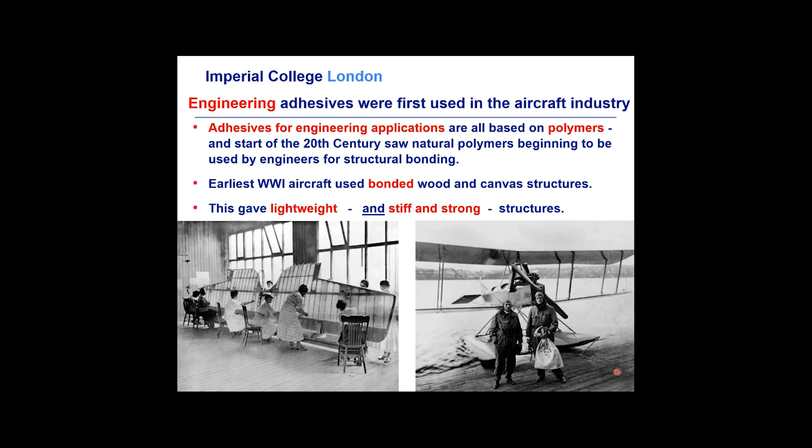Now, on from the First World War, in the Second World War, we have the very famous de Havilland Mosquito. It's all wood, of course, as I'm sure you know, and it's actually all glued together. It was developed really so that the furniture industry in North London and elsewhere in the UK could directly contribute to the war effort. Now, quite logically, they used their regular furniture adhesive, which was based upon a natural polymer called casein and was a byproduct of cheese production.

The glue was actually sufficiently strong and tough at first for the de Havilland Mosquito, but degraded when it was exposed to hot, wet climates and then completely lost its strength. So when the Mosquito aircraft were sent to the Far East in the very hot and wet climates there, they quickly started to fall apart. But we engineers are very innovative, and the maintenance engineers would put their heads into the wings of the Mosquito and smell. And if they smelt something like very old camembert cheese, they knew to take the plane out of service. So a very early form of a non-destructive test.

Later in World War II, the casein adhesive was replaced by synthetic polymeric adhesive, which was a urea-formaldehyde adhesive, which was far more durable and did not suffer such problems. In the 1940s, the first adhesive was developed for structural bonding of metals. This was a phenolic formaldehyde polymer toughened by polyvinyl formal. The first jetliner, the de Havilland Comet 1, flying in the early 1950s, needed to keep the weight down. And so this adhesive was extensively used to bond the thin aluminium alloy panels.

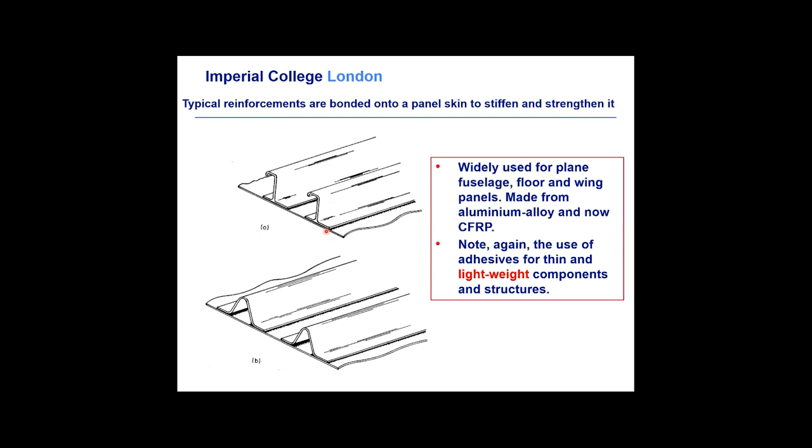And today adhesives are used extensively in aerospace and automotive industries. For example, a common use of adhesive is shown here. Here we have a thin aluminium alloy panel, just a few millimeters thick. And of course, that's all that separates you from the outside when you're flying. But to stiffen and strengthen and reinforce the panel, you can see here Z-shaped stiffeners or U-shaped stiffeners, and these are glued onto the aluminium alloy panel. So notice again really the use of adhesives for thin and lightweight components and structures.

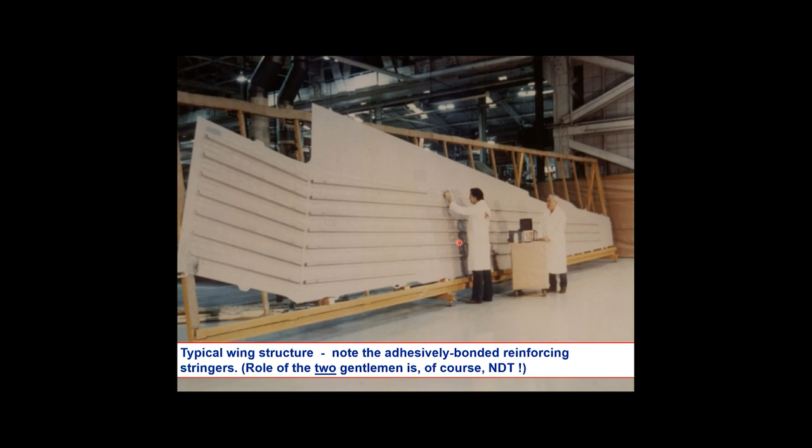Another use of adhesives is in making sandwich components. Here we have a thin skin, two thin skins, top and bottom. Here we have a honeycomb, and they're glued together to make this stiff, strong honeycomb panel. And it's also the way we make wind turbine blades, helicopter blades, and many, many other structures. And of course, without glue, how could you do it? You can't really envisage nailing or screwing this top panel onto the honeycomb panel, so we have to use adhesives.

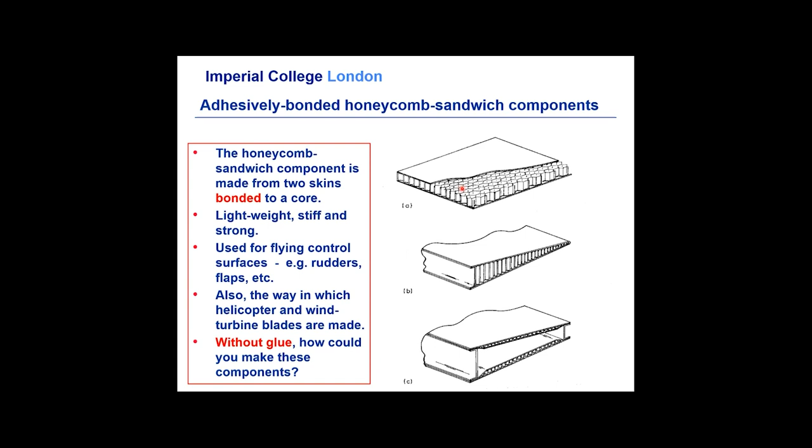This all comes together in an older type of aircraft using aluminium alloy, like the British Aerospace 146. So we have the fuselage, which is aluminium alloy with bonded on stiffeners and stringers, which give it its stiffness. We have the honeycomb structure in the rudder and the various control surfaces. So it's using adhesives quite extensively. And in fact, 90% of all the flying surfaces are glued.

So when you look out of the window and see that wing flapping up and down, etc., think of all that glue. And if you really are worried, my only suggestion really is to have that extra gin and tonic when at 30,000 feet. And that actually gives you a little bit more trust in adhesives.

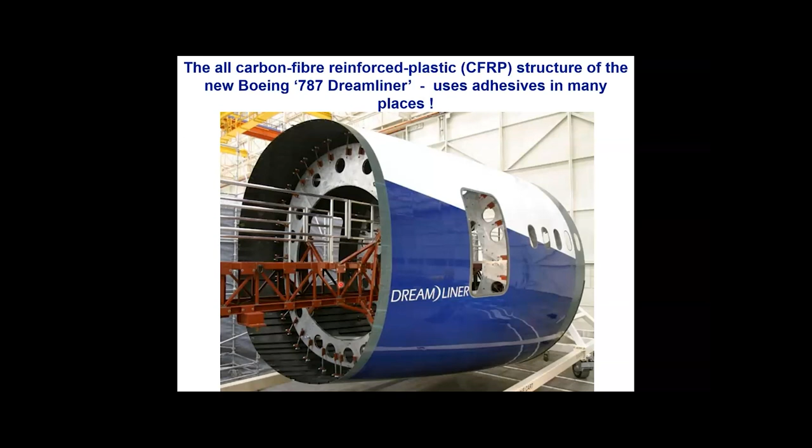So we've got carbon fiber reinforced plastic in many parts of the plane, and there's equal use of adhesives as with older metallic aircraft. In fact, you can see this here. This is the part of the equivalent Boeing 787 Dreamliner, and the Dreamliner uses adhesives as well, bonding carbon fiber plastic. You can see here the carbon fiber plastic being black metal, as the engineers like to refer to it.

So here we have the CFRP in the fuselage, and again we have thin skins. So again we reinforce the thin skins by bonding on these longitudinal stringers using adhesives to give the fuselage its stiffness and strength.

It's not only in the aircraft itself, but it's also in the engines now. If you look at what's called the front fan of an aircraft engine, and this is what you see if you board up the steps. So if you walk up the steps and look at the engine, you're looking at the front fan. The latest designs replace the front fan from metal into carbon fiber reinforced plastic.

You get a weight saving in the fan blades themselves, but you actually get a larger weight saving because the design has to allow for the fact if a fan blade breaks, it's actually contained within the engine. This, if it's a metallic blade, requires the engine casing to be thick, heavy steel, but if it's carbon fiber plastic, then it can just be a Kevlar type fabric. So you also save a lot of weight with the containment.

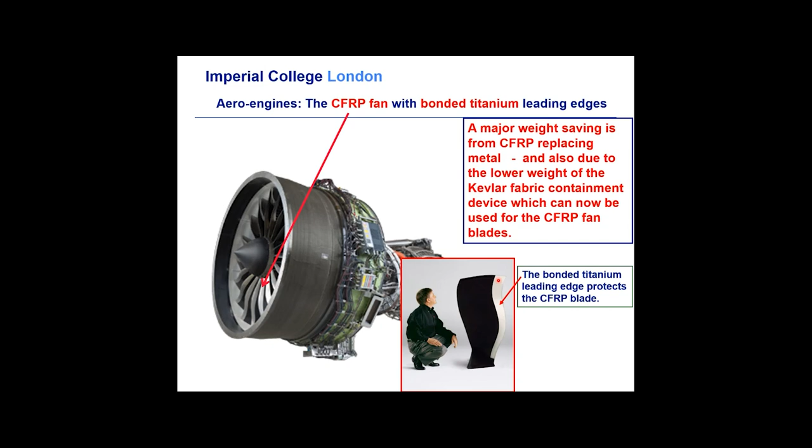But to protect the front of the fan blade from erosion, and also to cut up any bird that may enter the engine so it doesn't do any damage later on, the blade actually has a thin bonded titanium leading edge, which is glued onto the blade to actually protect the blade during use.

Now, if we think about the science behind the technology of adhesion and adhesives, then there's really three main steps we need to consider. Firstly, we need to establish intimate molecular contact and strong, stable molecular adhesion forces across the interfaces between the adhesive and the substrates being the materials we're joining.

Now, to achieve this first step, we need the adhesive in a liquid state, but now we wish to harden the adhesive to form a high molecular weight solid polymer which has strength and toughness and stiffness, and which will carry the loads, sustain impact damage, etc. And obviously, as engineers, we really want to ensure and predict the service life of the adhesive joint.

So there's really three separate stages we need to consider: the wetting and adhesion, the polymer chemistry, if you like, the hardening of the adhesive, and also as engineers to ensure and predict that the service life of the adhesive is sufficient for its application.

We therefore need to bring together surface chemistry, as you'll see, we often need to surface treat the materials before we join them, polymer chemistry of the adhesive, the physics of the process, and mechanical engineering in order to understand the science and technology of adhesion and adhesives. So we truly need the interdisciplinary skills from many branches of science and engineering. And I find that's what makes the science and technology of glue so interesting, is it's a true interdisciplinary subject.

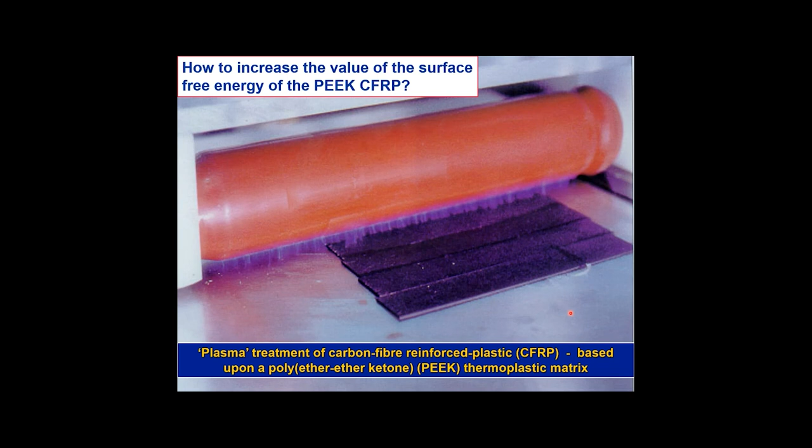Now we can look at this in more detail as surface chemists using a technique called X-ray photoelectron spectroscopy. In this technique, we fire X-rays at the surface and look at the photoelectrons which are ejected. The photoelectrons which are ejected just come from the first few nanometers of the surface. And what they do is identify the groups on the surface regions of the material.

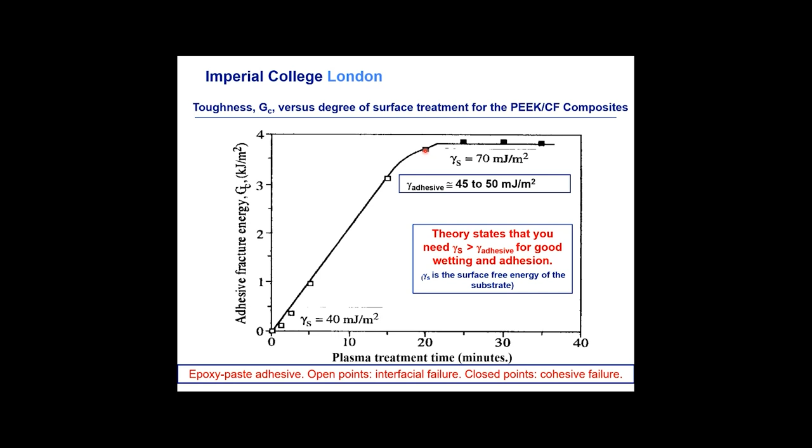Down here we obviously haven't met this criterion, and therefore we get poor wetting and adhesion, while up here we get the surface energy of the PEEK carbon fiber composite to be 70, greater than 45 to 50 of course, and therefore we get excellent wetting, very good adhesion, and we get cohesive failure through the adhesive layer itself. So the failure is in the glue, and that's why it plateaus out, and we have a toughness coming up for 4,000 joules per meter squared, which is very, very good indeed. So you can see the surface treatment is terribly effective for these thermoplastic fiber composites and is widely used now by industry.

Moving on to the next stage, and this is concerned with hardening of the adhesive. Now, to achieve the earlier requirement of good wetting and spreading, we needed a liquid adhesive to spread over the substrate, get intimate molecular contact, and achieve these high levels of intrinsic adhesion forces. But now, of course, as engineers, we want the joint to withstand high loads, be tough, etc. And therefore we have to harden the adhesive, or cure it as it's termed, to form a polymeric solid. And this really emphasizes the role of polymer chemistry and physics.

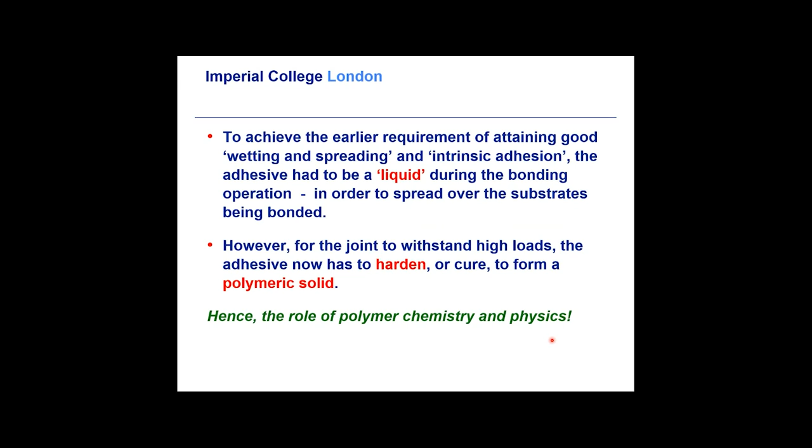Now, to harden the adhesive, for structural adhesives, engineering adhesives, we tend to use a chemical reaction. And therefore we have epoxy adhesives, which are very widely used and are cured by the addition of a second component and possibly with heat. I'm sure you're all familiar with two-tube Araldite. One tube is the adhesive and one tube is the second component hardener.

Other adhesives like super glue, cyanoacrylates, cure by moisture, and that moisture is present on the materials you're trying to join. Metals always have some moisture present at the molecular level, and that's why super glue works great on metals. Plastics don't have that level of moisture, and therefore they are not so good when using super glue. And other adhesives like acrylics cure with UV light, and they are widely used in the electronics industry.

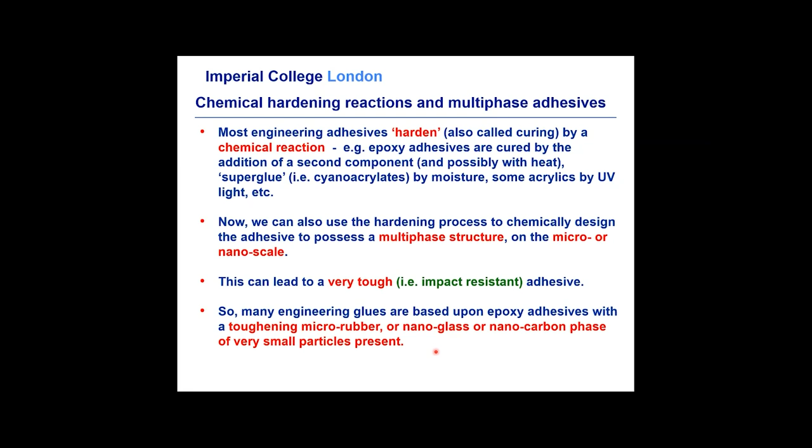But as materials engineers, we can also take advantage of the hardening process to chemically design the adhesive to possess a multi-phase structure on the micro or nano scale. And this can lead to a very tough, impact-resistant glue. So many engineering adhesives are based upon epoxy adhesives with a toughening micro rubber or nano glass or nanocarbon phase of very small particles present that give this multi-phase material, which can be very tough. And this shows an example.

Now, the presence of the rubber particles means that when the material is stressed, at a crack tip, for example, there will be a stress concentration of about 2 around their equatorial plane.

And this stress concentration in this area is good because the stress concentration arises from the difference in modulus and Poisson's ratio between the rubber and the matrix, and the stress concentration causes plastic deformation and energy absorption in the epoxy. So the rubber particles really act as catalysts in a sense for plastic deformation in the epoxy, and this can lead to higher toughness values by up to a factor of 20. So it's really very, very impressive.

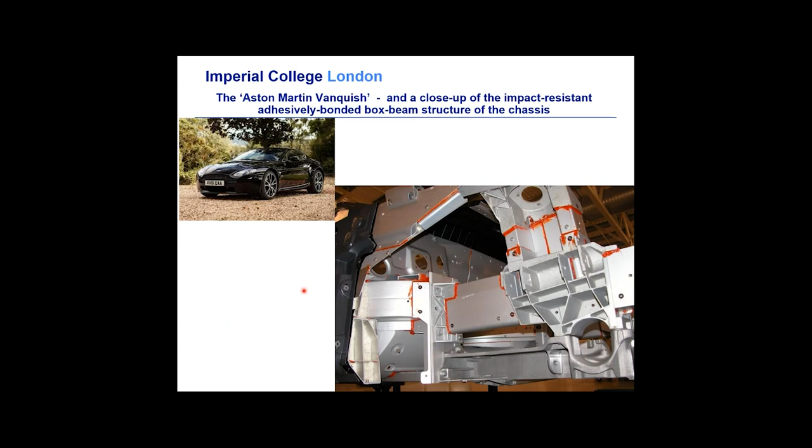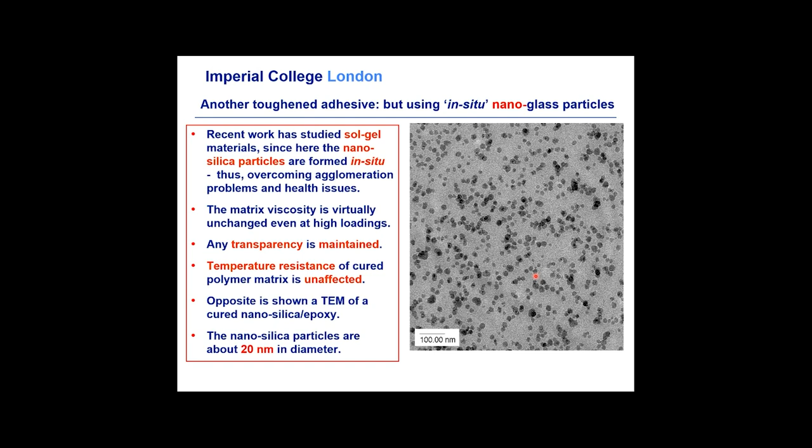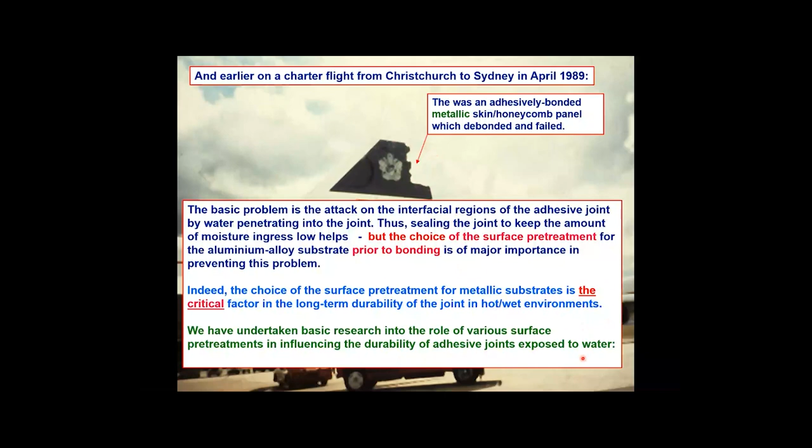As I said, the basic problem is really the attack on the interfacial regions between the adhesive and the oxide. Water gets in, attacks these regions, weakens them, and possibly leads to this problem of early service failures. So you can see that the surface pre-treatment for the metallic substrates is likely to be an important factor. In fact, it's the key factor in determining the long-term durability of the joint in hot, wet environments. And we've undertaken basic research in the role of surface treatments in influencing the durability of adhesive joints to water.

This shows aluminium alloy. It's a section, so you're looking at a section through aluminium alloy. And the standard treatment for aerospace aluminium alloys is to anodize. You put it into acid and pass a current through the solution, and this generates an oxide layer about 500 nanometers thick. This is the top surface to which you would apply the adhesive. Here's the aluminium alloy underneath it. Remember, this is a side section, so you're looking sideways on.

And it's rather like a collection of empty drinking straws. You can see there's a hollow here, potentially which an adhesive could get into to fill. So you're really looking at a side section of open-ended drinking straws, which forms the oxide on top of the aluminium alloy. But it's actually quite a complex technology. And what we found in the research was that if you applied just the epoxy adhesive straight to the oxide, you actually got poor joint durability.

And we wondered why. And the reason is here, this is a section again, so we're looking sideways on. This is an energy filtered TEM, and energy filtered TEMs allow you to identify elements. So we have the adhesive here, which goes off the slide into the distance. Here's about half a micron, 500 nanometers, of the oxide generated by phosphoric acid anodizing. Here's the aluminium alloy.

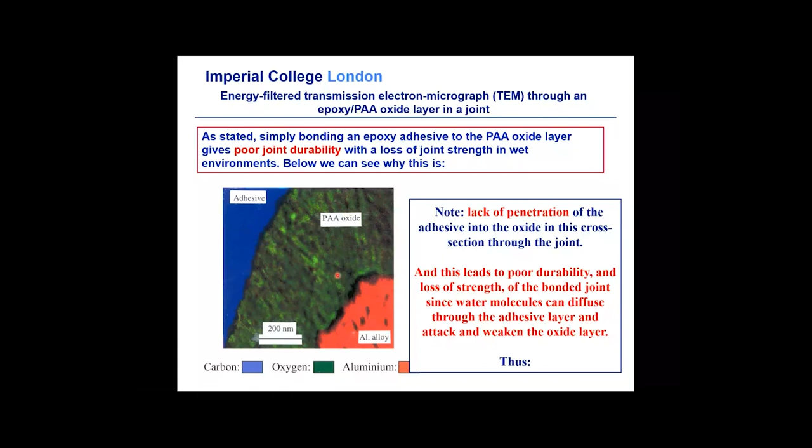Now, the way of avoiding this is to apply a primer. So you can apply a primer, which is a very low viscosity material, usually an epoxy, and usually the opportunity is taken to put corrosion inhibitors, coupling agents to aid bonding, such as chromates, phenolics and silanes. It's really like a witch's brew into the primer.

Now, the primer layer is usually about 100 microns thick, and therefore on this scale the primer layer is off the slide, and then the adhesive layer is applied on top of the primer. But the important aspect is really the primer oxide interface. So you can see now the primer, and carbon is blue, remember the carbon penetrates deep into the oxide. So you get primer penetration into the oxide.

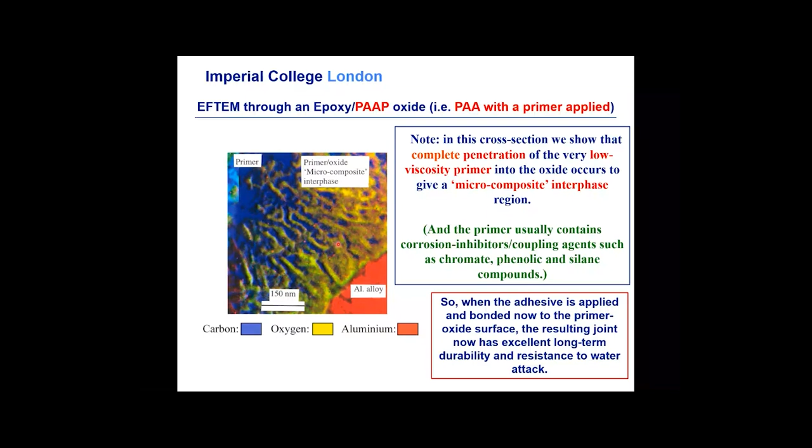So you actually form a micro composite interphase region. No longer does the adhesive or primer just sit on the top, it actually penetrates into the structure. And when you do that, you get excellent long-term durability and excellent resistance to water attack.

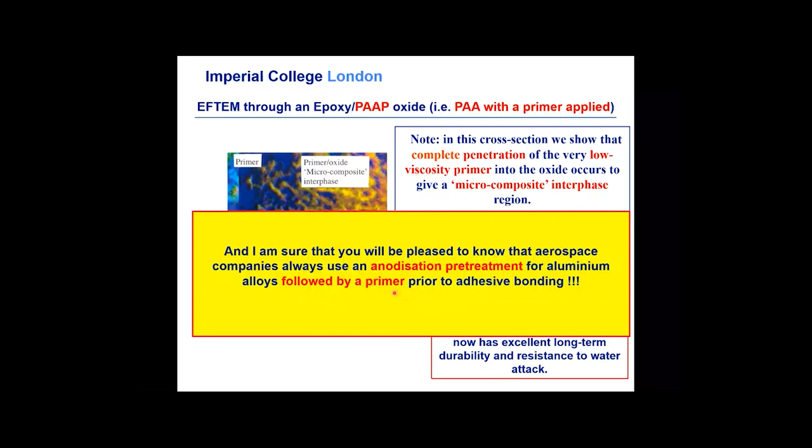And I'm sure you'll all be pleased to know that aerospace companies always use anodization treatment followed by a primer before they apply the adhesive. And by this technique, they get excellent durability, and also by applying the primer on top of the freshly treated oxide, they can actually store the primer treated oxide for some time before they have to adhesively bond it. So it's a manufacturing aid as well as an aid for durability.

Coming to service life predictions. Now, on predicting the service life, Niels Bohr once made the famous statement, which I'm sure is very, very true, and prediction is always a nightmare. If you're doing modelling, it's always best to know the answer before you start, but obviously in real life that's not the aim of really doing quantitative predictions.

Now, I've tried to avoid, as you see, equations in the talk, but I can't really avoid it here. So if you don't like equations, and we're coming near the end of the talk, of course, now's the time to go and make a quick cup of coffee, or if you're on UK time, maybe fill up the glass of wine.

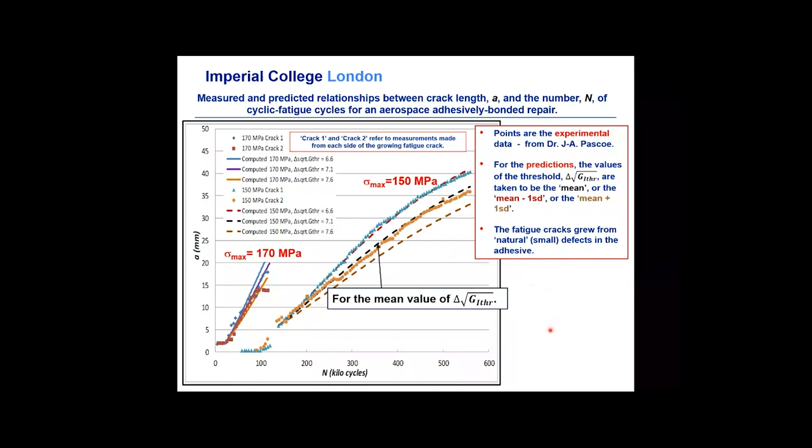There actually are no fudge factors, empirical factors at all in this. It either fits or it doesn't. As you can see, it fits quite well. And this is the sort of work that Rhys and I are now working on for adhesives and for composites. And it's looking very good in other structures as well. So it's looking like a very nice approach to actually predicting the cyclic fatigue long-term life from short-term fracture mechanics experiments. Some final thoughts on adhesion and adhesives.